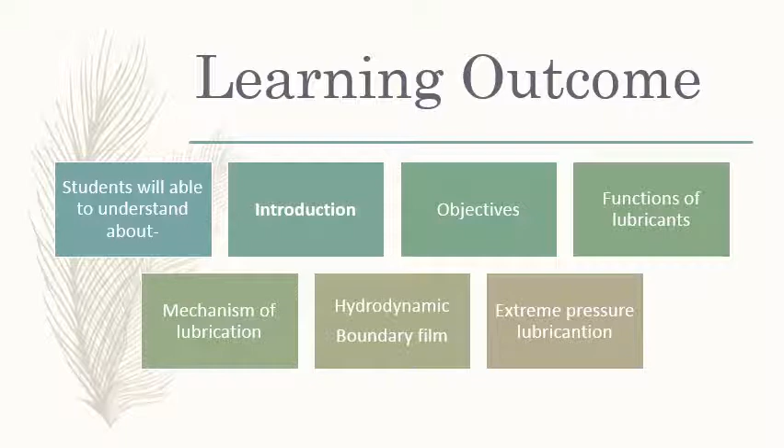To understand the lubricant substances, we should know what is friction. The friction is any force that resists the motion, or we can say it's an opposing force by the surface where the external force is applied.

So here you are able to see that the two surfaces are in contact with one another. The upper surface is in contact with the lower surface. So when an external force is applied to slide the upper surface over the lower surface, the resistance produced by this lower surface, that resistance force is called frictional force.

Understood? It arises due to the contact points. Here you can able to see the points which come in contact between these two surfaces produce that opposing force which is called friction.

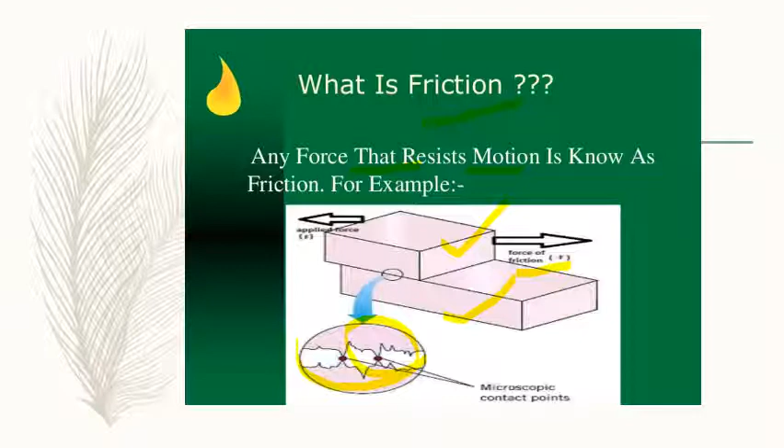Friction is a necessary evil. Why it is said? Friction is necessary because without the friction we cannot think about our survival of life. We are walking due to the friction. We are writing on the board, it is also due to the friction. The brakes of the vehicles function because of friction. If the friction is not there, the thing which is started cannot stop.

But it is an evil where in the application, the major engineering application, in the machines, in the automobile, it acts as an evil because various drawbacks of the excessive friction cause damage to the part of the machine and decrease the efficiency of the machine. So there it is having the drawback.

So the drawbacks, or we can say the disadvantages of the excessive friction in that application: it decreases the efficiency of the machine, it causes wear and tear of the machine, wear and tear of the different parts in the machine. If any one part in the machine is damaged, then it disturbs the whole working of the machine.

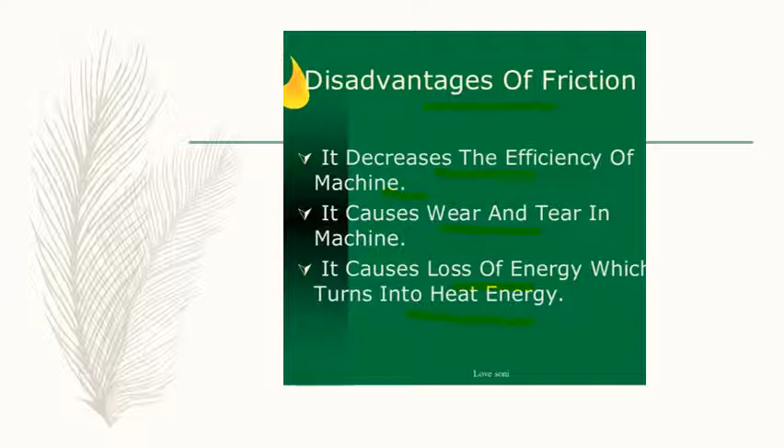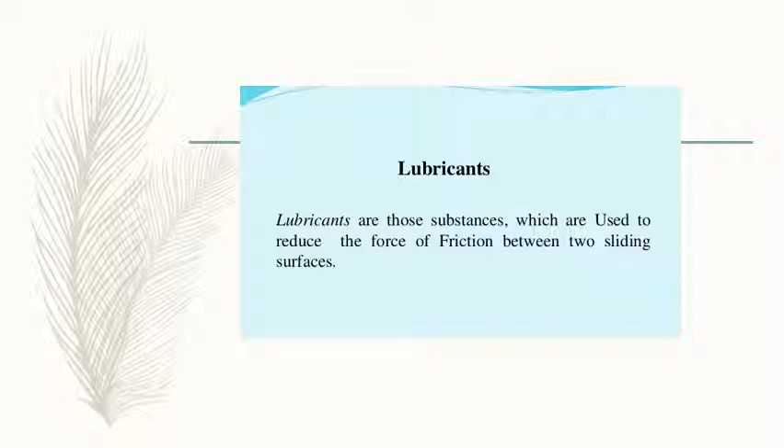So what are lubricants? We can easily define now. Lubricants are those substances which are used to reduce the frictional force between two sliding surfaces, moving surfaces or rolling surfaces, to minimize the frictional resistance which arises between the two moving, sliding or rolling surfaces. There is a necessity of using such substances that are called lubricants.

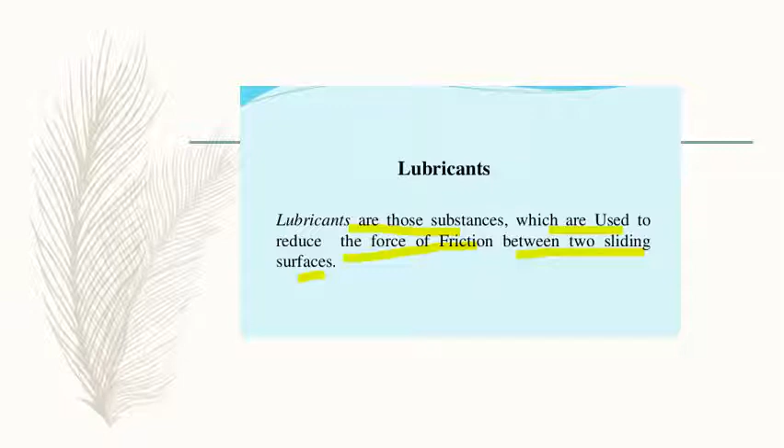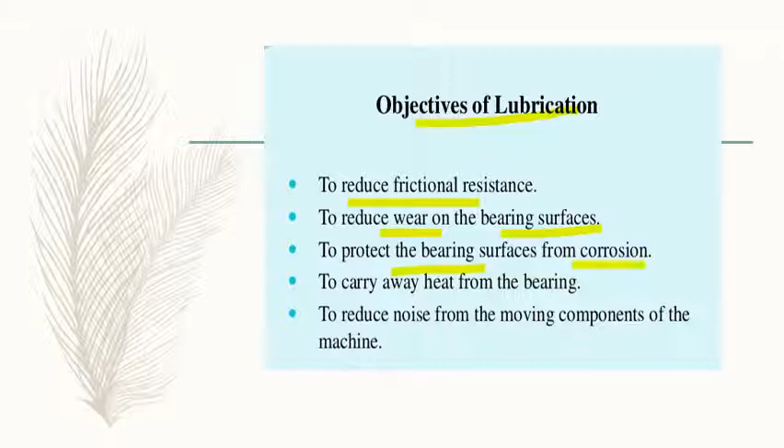What are the objectives of lubrication? To reduce the frictional resistance between the surfaces, to reduce the wear on the bearing surfaces, to protect the bearing surfaces from corrosion, to carry away the heat from the bearing, to reduce the noise from the moving components of the machine. So these are the objectives why the lubricants are necessary substances to use in the machines.

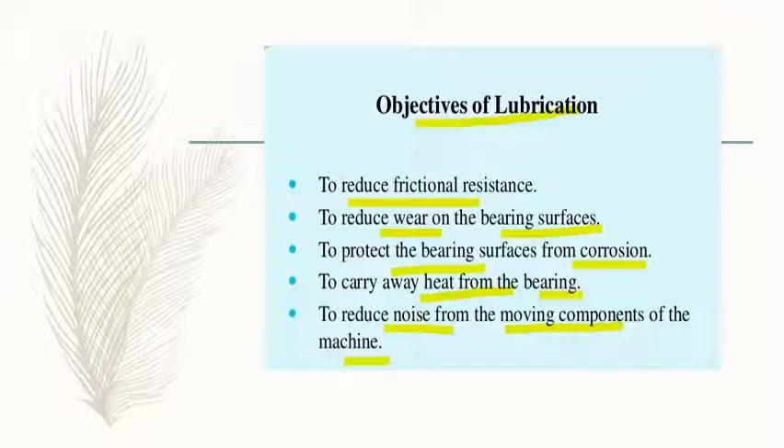Now we discuss the various functions of the lubricant. The first and foremost function of the lubricant is to reduce the frictional resistance or the frictional force which arises between the two moving, sliding or rolling surfaces. So that is one of the most necessary functions of the substances to be used in such applications to reduce the frictional resistance.

The other function of the lubricants is cooling. It absorbs the heat which is released due to the excessive friction. That is also called frictional heat.

It also minimizes the noise of a moving machine. When the machine runs and excessive friction arises, the voice and the unwanted sound comes out which results into noise. So the lubricant minimizes this noise of a moving machine.

It acts as a seal. This is again an important function of a lubricant. It prevents the leakage of the gases under high pressure and temperature. So it prevents the leakage of the gases there, so it acts as a seal also, its function.

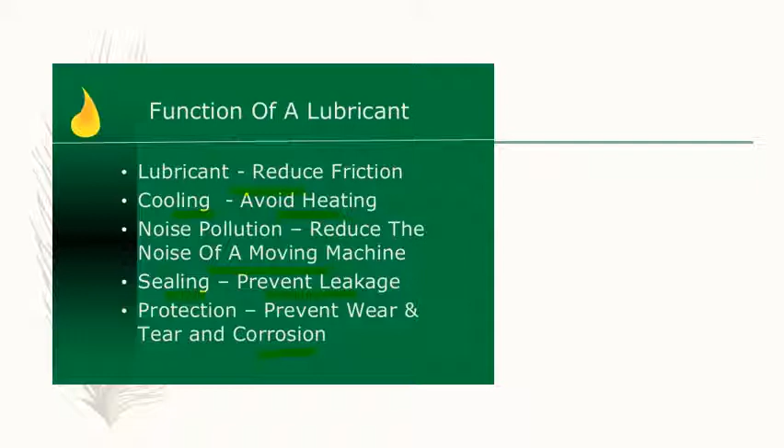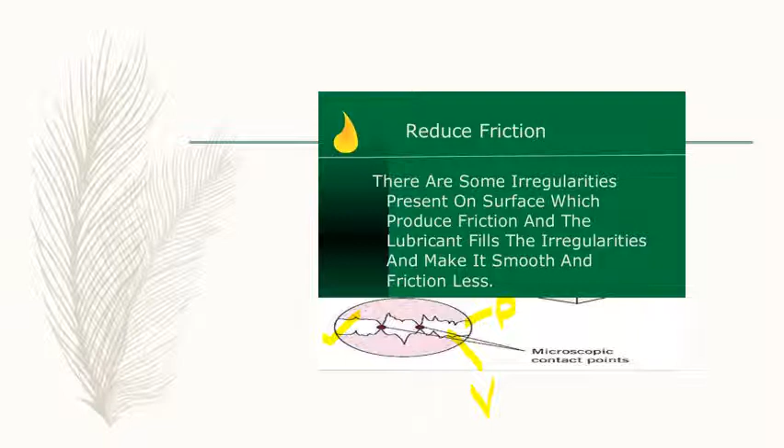So when two surfaces come in contact, these irregularities actually come in contact. When the peaks and valleys of the first surface come into contact with the peaks and valleys of another surface, what happens? When they come into contact with one another, these irregularities lock to one another, and this is how it produces excessive friction.

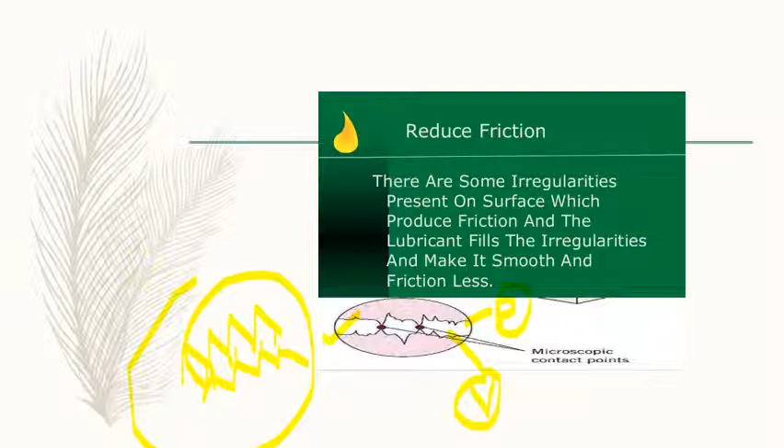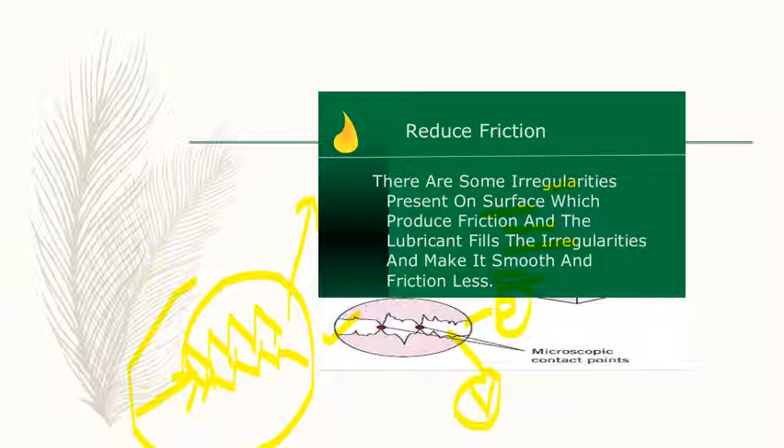Interlocking takes place. This is called interlocking of the irregularities. To minimize this interlocking, we provide lubricant between these irregularities so that they do not come into contact with each other. The irregularity present on the surface produces friction, so we apply lubricant which fills these irregularities and makes it smooth to become frictionless. This is how it reduces the friction. We apply lubricants between these surfaces which fill up these irregularities and minimize the friction. This is how it plays its role.

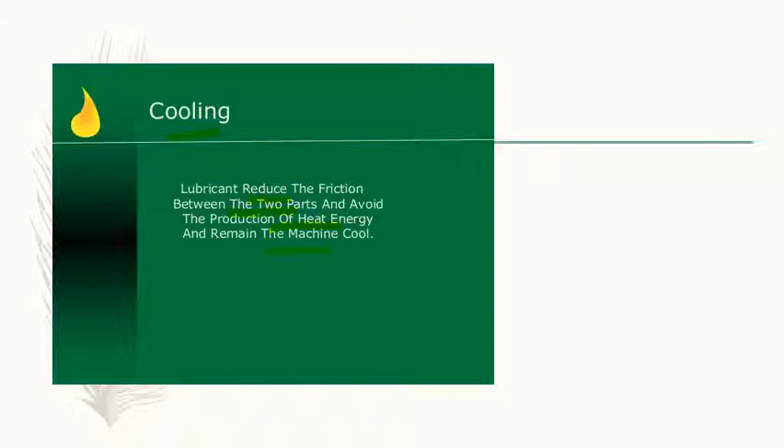The next function is the cooling function. The lubricant reduces the friction between the two parts and avoids the production of heat energy, and keeps the machine cool by absorbing the heat released by the friction of the two parts or surfaces. So it carries away the heat from that part and makes the machine cool by absorbing the heat. So it acts as a coolant.

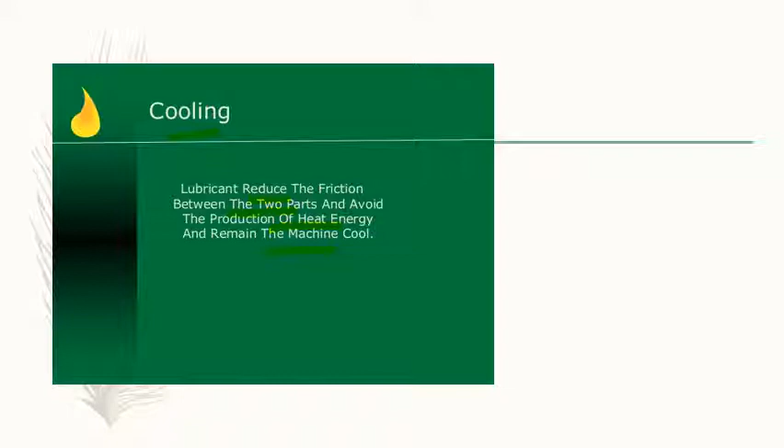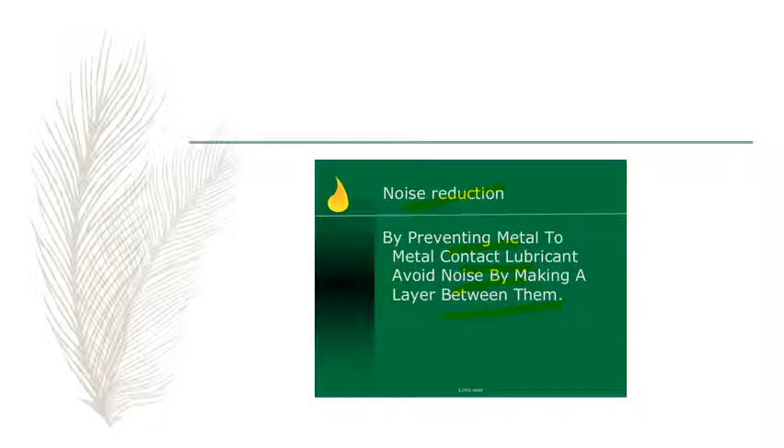For noise reduction, by preventing metal to metal contact, lubricant avoids noise by making a layer between them. So as the contact between the surfaces or irregularities reduces, the noise also reduces.

It acts as a seal, where in the internal combustion engine it is applied between the cylinder and the piston, where it prevents the leakage of gases under high temperature and pressure. So it acts as a seal also. This is a very important function of the lubricant in an IC engine.

After understanding the important functions of the lubricant, we should learn about the lubrication phenomena. What is lubrication phenomena? Applying lubricants between two moving, sliding and rolling surfaces is called lubrication. And we can understand lubrication by its mechanism.

There are three types of mechanisms of lubrication. The first is hydrodynamic, also called fluid film or thick film lubrication. The second is thin film or boundary film lubrication. And the third is extreme pressure lubrication.

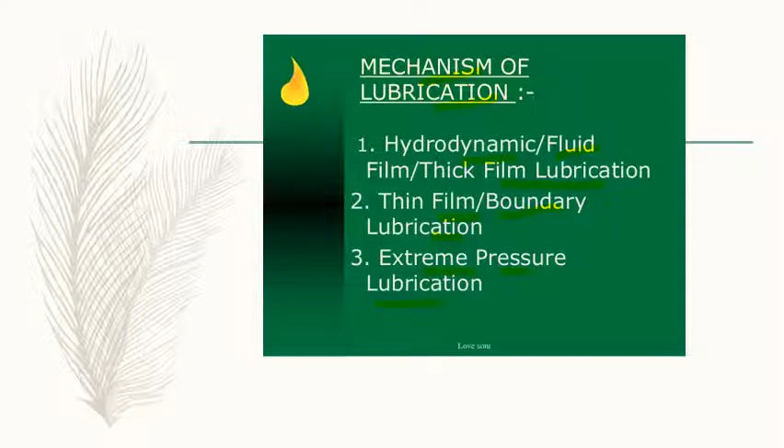What is thick film or hydrodynamic lubrication, also called fluid film lubrication? In this mechanism, we apply a thick layer of lubricant of at least 1000 Angstrom thick between the two moving or sliding surfaces. If we apply at least this thickness of layer between the surfaces, this type of mechanism is called thick film. As the name indicates, it reminds us that at least a 1000 Angstrom thick layer is introduced between the two surfaces.

Now, this thick layer of lubricant can be provided by which lubricant? The suitable lubricant to apply this thickness of layer is hydrocarbon oil. So for thick film lubrication or hydrodynamic lubrication, hydrocarbon oils are used.

But its viscosity should remain the same in all seasons, because we know in summer the temperature is high, and viscosity depends on temperature. As temperature increases, viscosity decreases. If this happens, what happens? The oil squeezes out between the surfaces, so it does not play the role of reducing friction. So to maintain viscosity in all seasons, hydrocarbon oil is blended with long chain polymers. This is to be done if we are going to have this type of mechanism, thick film or hydrodynamic lubrication.

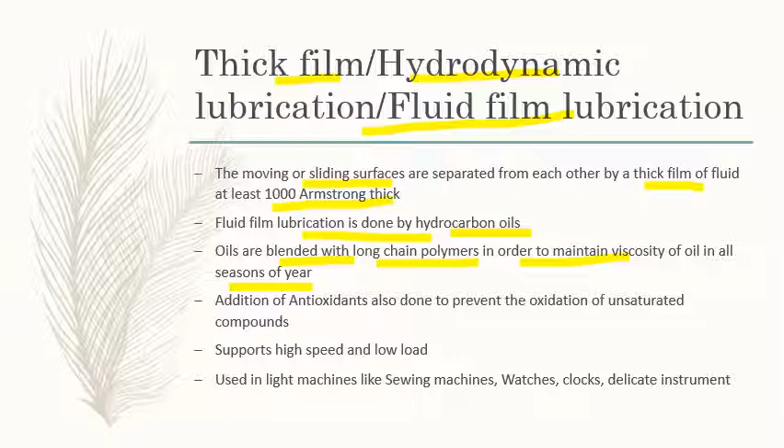Now one more problem occurs using hydrocarbon oil, because hydrocarbon oil consists of saturated as well as unsaturated hydrocarbons. Saturated hydrocarbons have single bonds, and unsaturated have double and triple bonds. Unsaturated hydrocarbons have a tendency to readily oxidize and convert to other gummy products. If this happens, it leads to the formation of gummy products which minimize the function of the lubricant. So addition of antioxidants is also done to prevent oxidation of unsaturated hydrocarbons.

So addition of antioxidants as well as long chain polymers is done in the hydrocarbon oil, and then it is used in the mechanism. This type of mechanism supports high speed and low load. In applications where speed is high and load is low, this type of mechanism works out. That's why it is used in lighter machines like sewing machines, watches, clocks, delicate instruments, and scientific instruments. So these are the applications of this type of mechanism where we can use thick film lubrication, in lighter machines where speed is high and load is less. There we can easily use this type of mechanism.

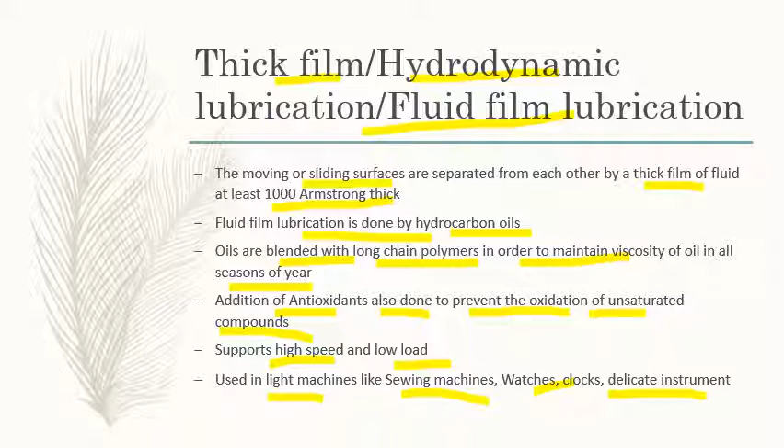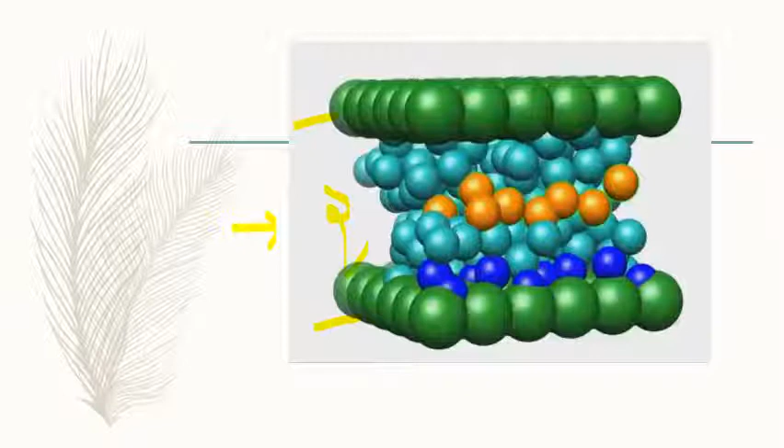After thick film lubrication, the next mechanism is the boundary film, or thin film lubrication. As the name indicates, thin or boundary film is used where the space is too little to apply a thick layer. So we apply a thin layer of lubricant where the space is less, and it supports high load and low speed. It is applied where the load is very heavy or high and the speed is less.

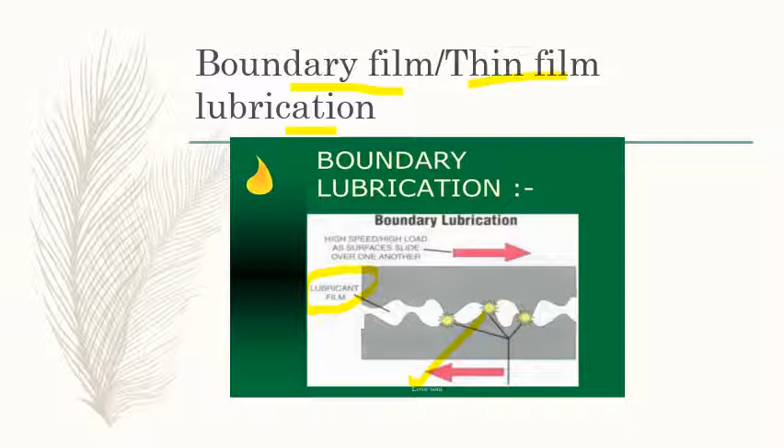So in such applications, this type of mechanism is suitable. The boundary film or thin film lubrication comes into play when the thick film lubrication fails. Where the space is not enough to apply a thick layer of lubricant in the machine, we can use thin film or boundary film lubrication. It supports heavy load and the speed is slow. The viscosity of the oil is low to apply the thin layer. So that is the mechanism called thin film lubrication.

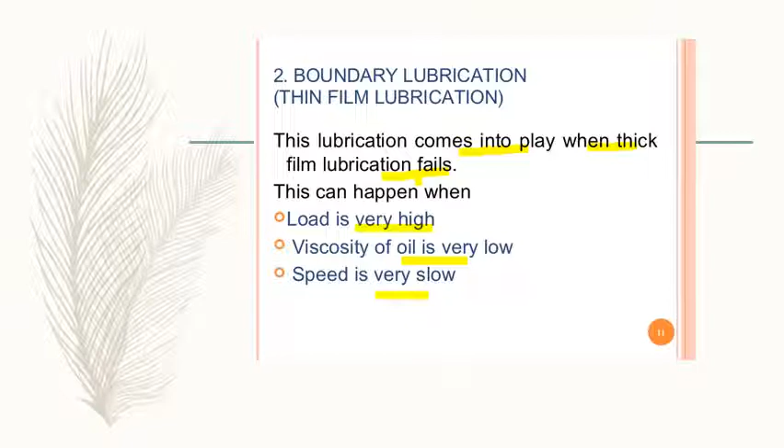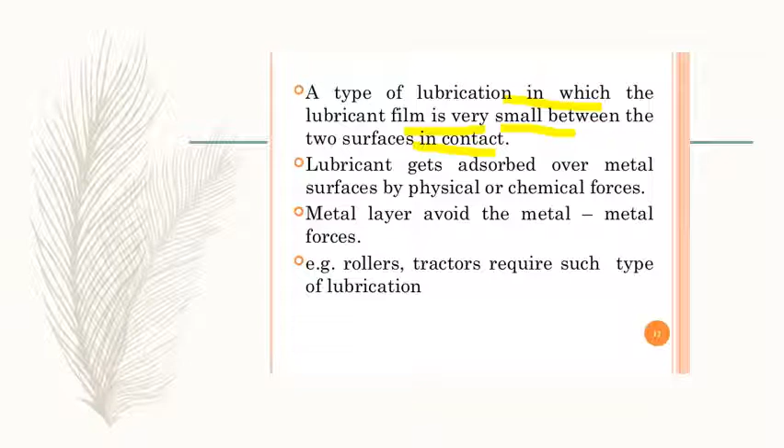Boundary film lubrication is the lubrication in which the lubricant film is very small between the two surfaces in contact. We have seen that thin film lubrication has a very thin layer of lubricant between the surfaces. The lubricant gets adsorbed over the metal surfaces by physical or chemical forces, which prevents friction. The metal layer avoids metal-to-metal forces.

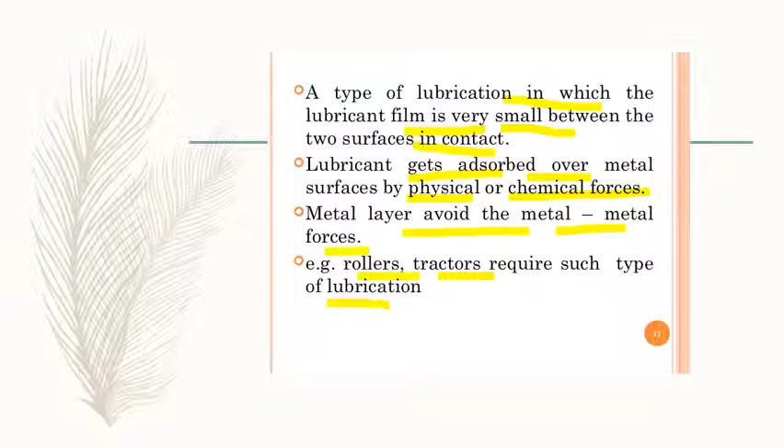So it always supports heavy load and the speed should be less. The applications where we can use this type of mechanism are rollers and tractors. So the difference between thick film and thin film, we need to better understand. Thick film applies a thick layer of at least 1000 Angstrom, used where there is appropriate space between the surfaces. But if the spaces are not enough to use thick film, we use thin film lubrication.

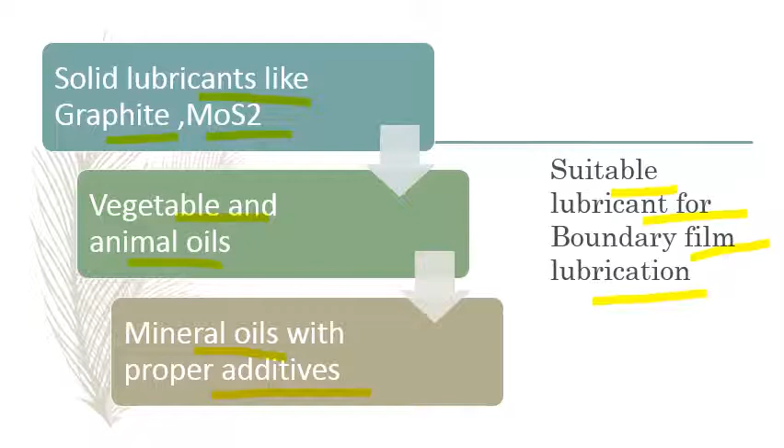So suitable lubricants for the boundary film or thin film lubrication, we can select any one of the following. Solid lubricants such as graphite and molybdenum disulfide. We can also use vegetable and animal oils. We can also use mineral oil with proper additives, adding some fatty acids to improve the stickiness or oiliness to stick over the surface, and it can be applied between the surfaces. So any one kind of lubricant can be used for this mechanism.

The next mechanism is extreme pressure lubrication. When conditions are at the extreme level, as we've seen, thick film lubrication works when speed is high and load is low, and thin film supports heavy load with low speed. But under extreme conditions, the speed is high, the load is also high, and the temperature is also high.

So in extreme conditions, neither thick film nor thin film lubrication can function, because if we use the lubricants seen in thick film and thin film, they undergo evaporation and decomposition. So in such extreme conditions, we should use extreme pressure lubrication. When the moving surfaces work under very high pressure and high temperature, ordinary liquid lubricants either vaporize or decompose, so this mechanism works out.

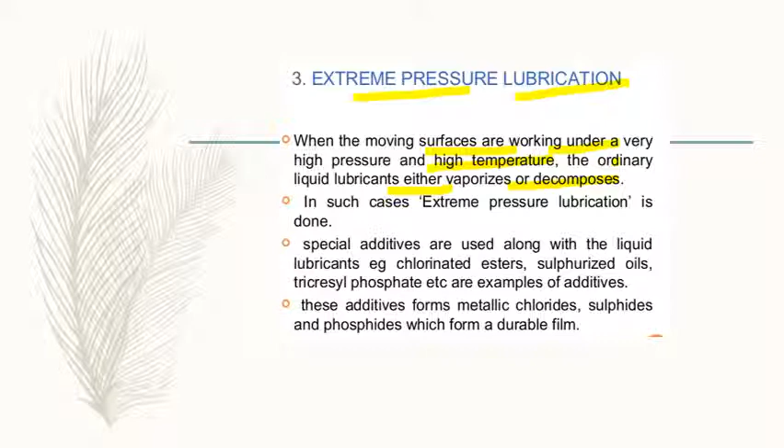In this mechanism, special additives are added along with some liquid lubricants having active functional groups. For example, chlorinated esters, sulfurized oils, and tricresyl phosphate. They have active functional groups like chlorine in chlorinated esters, sulfur in sulfurized oils, and phosphorus in tricresyl phosphate.

So what do these groups perform? These groups form metallic chlorides, sulfides and phosphides compounds, which have a very high melting point. That's why it forms a durable film across the surface, so it doesn't decompose or evaporate, and under extreme conditions the lubricant performs its function. This is called extreme pressure lubrication.

So when conditions are at the extreme level, that is high temperature and high pressure, and we cannot use thick film and thin film lubricants, such lubricants with proper additives are used, having active functional groups like chlorine, sulfur and phosphorus. They react with the metal to form metallic chlorides, sulfides and phosphides, which have a high melting point. So these are the three types of lubrication mechanisms.